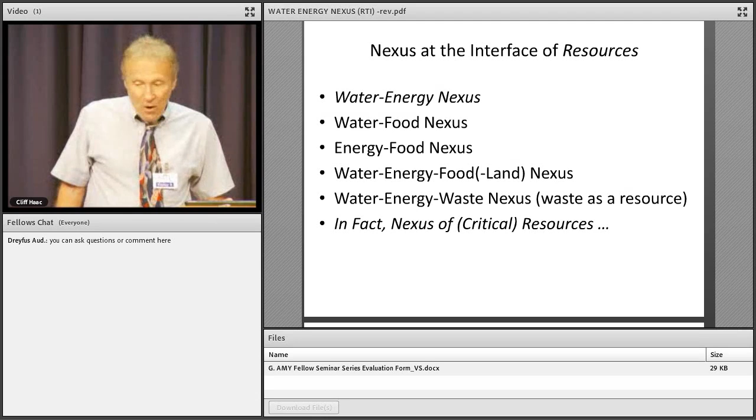So the water energy nexus, I'd like to talk about it, but I'd also like to extend the discussion into other critical resources. So let's first of all establish a vocabulary. What is a nexus? It's a relation or series of relations that will link 2 or more things. So we can think about the nexus at the interface of resources. We'll spend most of our time today on the water energy nexus, but we'll delve into the water food, the energy food, the water energy food nexus, and since food is connected to land, we'll talk a little bit about the land extension. And then given that waste is a resource, we'll talk about the water energy waste nexus as well. So it's really about a nexus of what we consider critical resources.

Oops. Uh-oh. That's part of my...

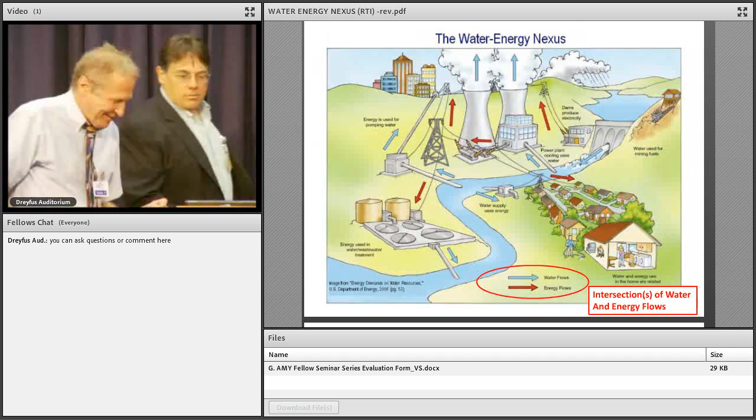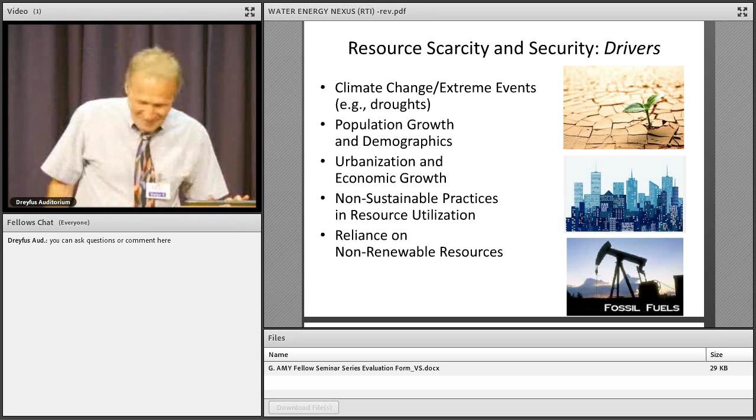Okay, right. Okay. I missed something there, so... Okay, right. The animation was supposed to take care of that, so... Okay. That one? Yeah, but it's supposed to be another version of this, so... Okay, I guess the animation's not going to come out on this, so... Okay, bear with me. Okay. So now we're going backwards. Okay. So now if we do that. All right. There we go.

All right. Sorry for these technical difficulties, but let's go in and talk in more detail about the water-energy nexus. When we think about the water-energy nexus, we're talking about the interconnectivity of water and energy. So obviously there's embedded energy in water, there's embedded water in energy, and we can think about the energy footprint of water processes and systems, the kilowatt hours per cubic meter of water.

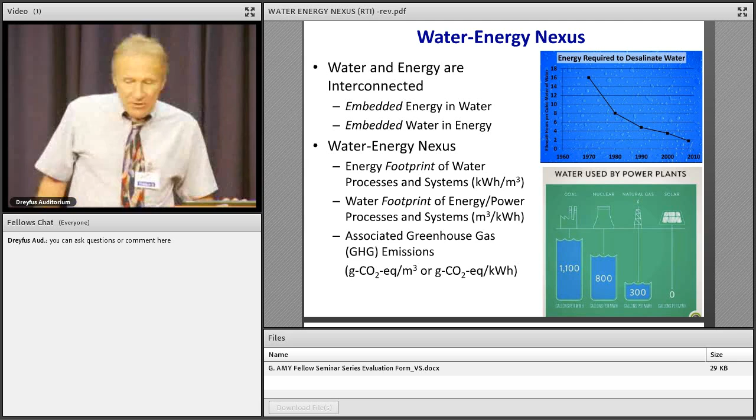We can also talk about the water footprint of energy processes and power processes and systems. Here we're talking about the investment of a cubic meter of water to produce a kilowatt hour of power. And of course, associated with this are greenhouse gas emissions in terms of CO2 equivalents per cubic meter or per kilowatt hour.

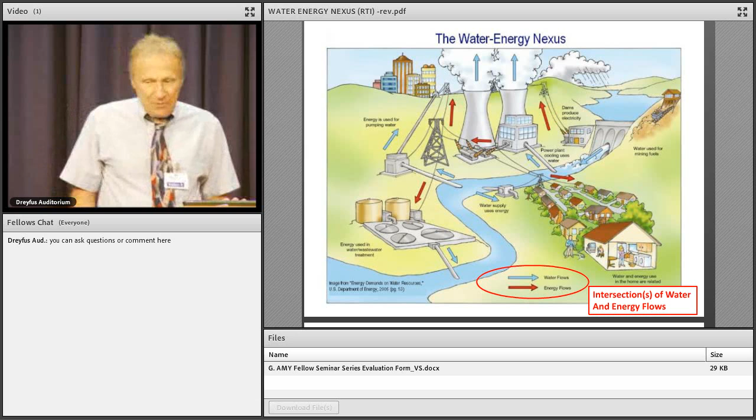So the water-energy nexus, this diagram from DOE shows the water flows and energy flows associated with an urban system. But what's interesting is to look at those points where there are potential intersections of water and energy flows. And this really represents the examples of the water-energy nexus.

Let's talk about water and energy trade-offs. So we can talk about water demand for power. This could be hydroelectric power. It could be cooling water for power plants. We can talk about water demand for fuels. This could be feedstocks for biofuels. This could be the water invested for extracting oil and gas, either conventional or unconventional oil and gas. Mining of energy sources like coal, and refining and upgrading fuels.

And then the energy demand for water. Here we've got to talk about the energy required for extracting water, for treating water, and for transporting and moving water.

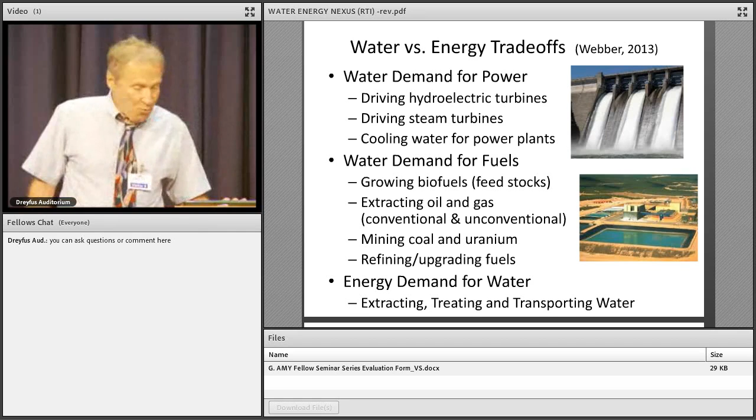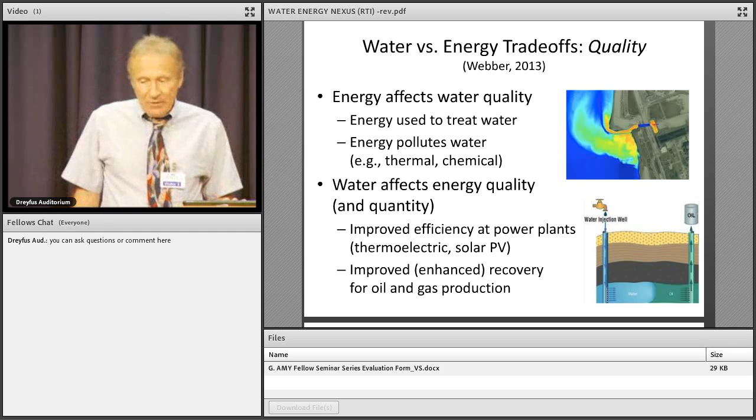Let's talk about energy and water trade-offs related to quality. Obviously, energy affects water quality. We invest energy to treat water, to produce drinking water, for example, but also energy can pollute water when we think about thermal pollution from power plants. And water also affects energy quality. One example of this would be enhanced recovery of oil and gas through water flooding.

So, water and energy solutions. What can we do to really reconcile some of these challenges posed by the water-energy connections? We can think about source switching for water or fuel. We can think about using impaired quality water, such as wastewater or seawater or saline waters for cooling water or for oil and gas extraction. We can think about fuels that require less water.

We can think about more efficient and enhanced technologies that are either energy lean or water lean. Here we can think about water lean energy technologies, dry cooling, for example, waterless fracking, for example. We can think about energy lean water technologies, low energy membrane processes. We can think about using waste heat for water treatment.

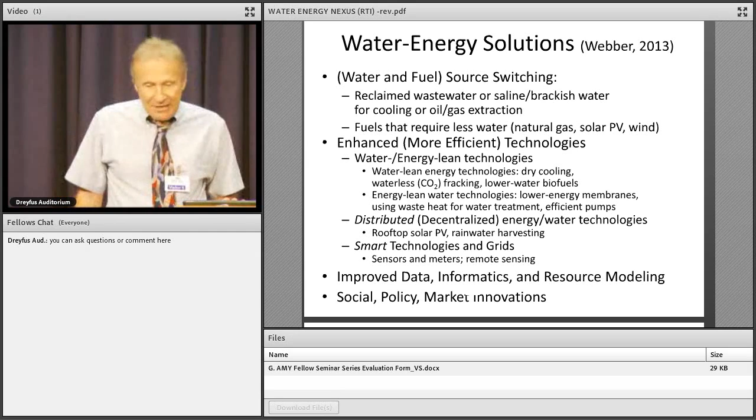And we can also think about how we might look at distributed or decentralized water and energy technologies as well, and the use of smart technologies and grids. We can think about how we can apply improved data mining, informatics, and resource modeling, and also how we can move technologies forward through innovations in social science, policy, and market opportunities.

So energy solutions by water sector. When we think about wastewater treatment, we can recover energy from wastewater treatment. Biogas can be recovered, methane. We can also think about applying renewable energy to drive water purification, such as desalination. This could be solar, this could be wind, but the problem with solar and wind is they have an intermittent character. But we can think about other innovations in terms of combining different energy sources. A combined cycle with solar and geothermal, where we use solar during the day and geothermal during the night.

Water solutions by energy sector. So when we think about cooling, we can think about dry or hybrid cooling. Think about non-traditional or impaired quality sources of water for cooling, seawater or reclaimed wastewater. These present some operational challenges, however, in terms of managing scaling and biofouling.

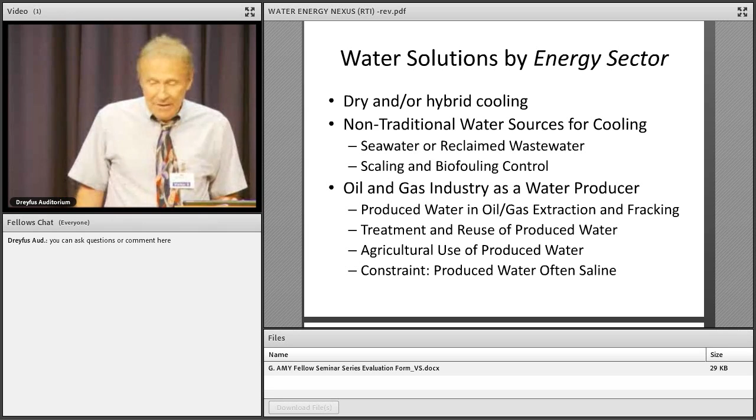And in the oil and gas industry, we have to think about the fact that the oil and gas industry is also a water producer. Saudi Aramco, the largest oil company in the world, considers itself an oil company and a water company in terms of how they manage their water. So there's tremendous amounts of produced water in oil and gas extraction and fracking. We have to think about how we can treat and reuse this produced water, and even possibly imagine agricultural use of produced water. The constraint in terms of using produced water is that it's often saline.

Okay, let's look at USA water withdrawals by category. And so if we look at these different categories, it's obvious that thermoelectric power and irrigation are the major uses of water in the US. But we also have to distinguish between withdrawals of water and consumptive uses of water as well. And so in thermoelectric power, we have a large consumptive use due to evaporative losses.

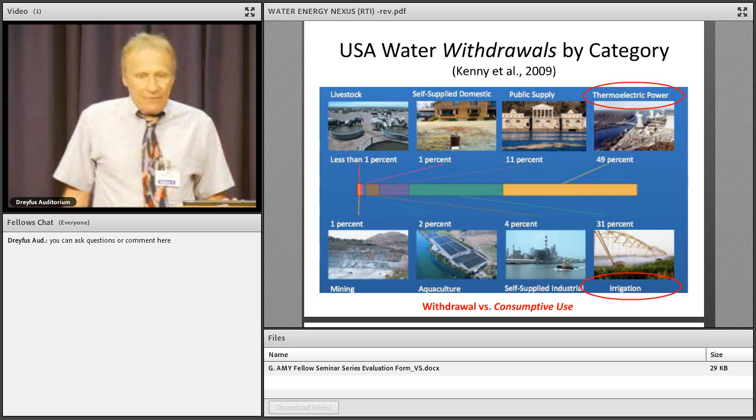So energy intensity of municipal water use. So if we look at the water cycle, in blue we see our drinking water part of the water cycle. In red we see the wastewater part of the water cycle. And then in green we see our interventions in capturing reclaimed water for reuse and recycling.

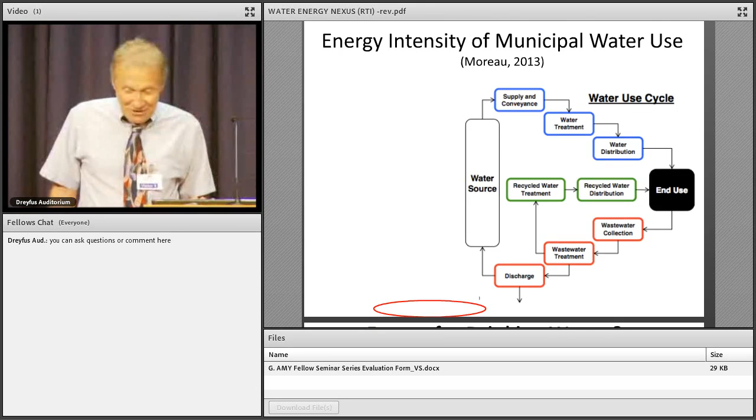I'm worried that this is part of the animation problem here. Yeah. So part of my animation has disappeared as this was converted to PDF. So, yeah. So I'm sorry, but okay.

So let's take a look at the urban water cycle and the energy nexus. So if we look at how we move water, for example, in the drinking water side of things in the upper right, we transport water to the waterworks. We think about treating that water and then distributing the water. And we have to invest so many kilowatt hours per cubic meter to do this.

And then once we go through the cycle of domestic water use, then we have to treat the sewage, collect the sewage, and dispose of the sewage. And so energy considerations are a dominant factor in the urban water cycle.

Let's take a look at seawater reverse osmosis and think about the energy consumption issues related to seawater reverse osmosis for desalination. So a seawater reverse osmosis system consists of an intake, pre-treatment, the reverse osmosis membrane step itself, and post-treatment. And so what we see here are a series of arrows that represent energy consumption. And the thickness of these arrows is really commensurate with the amount of energy that's consumed at the various stages.

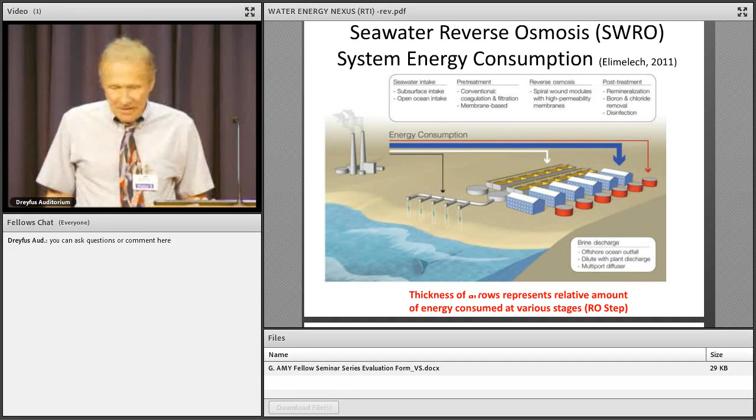And so the real energy hog, so to speak, here is the reverse osmosis step itself. And so we need to think about how we can develop new disruptive technologies that will provide lower energy consumption in removing salts from water.

Let's take a look at California. California is kind of interesting because California expends a lot of energy in moving water. What we have is dry and thirsty Los Angeles in the lower part of the state. And Los Angeles, Southern California, gets its water from Northern California through the California Aqueduct and from Arizona, Nevada through the Colorado River Aqueduct.

And what we see in the upper right-hand corner is a graph showing the energy expenditures just to move water from Northern California and the Colorado River to Southern California. Not treating it, just moving it over topographical barriers and so forth. And so obviously there's a lot of interest now in California in turning to the ocean. We can see that Los Angeles is right in the proximity of the Pacific Ocean, and reinvesting that energy into desalination.

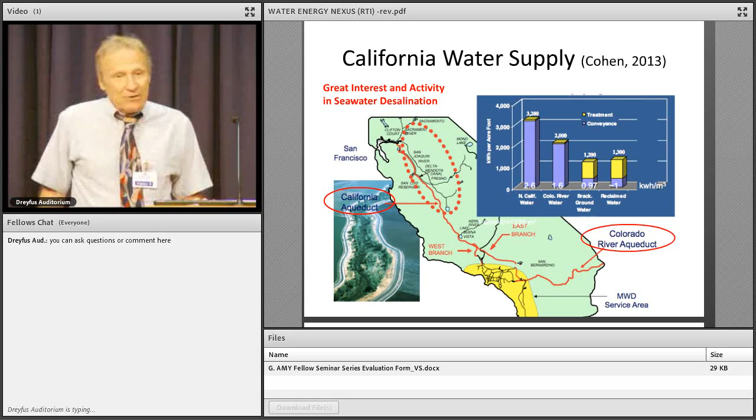So let's take a look at energy uses for different wastewater treatment processes. So here we see energy use, kilowatt hours per cubic meter. Some of these are fairly low energy intensity, trickling filters, for example. And then as we go to more and more advanced municipal wastewater treatment, we spend more and more energy.

Now, one of the things that's really an energy sink is in wastewater treatment, we use biological treatment that requires oxygen, and so we have to aerate. And aeration is very energy intensive. The activated sludge system requires a lot of aeration. Membrane bioreactors require aeration not only for oxygen, but also for membrane fouling control as well. So these are very significant inputs of energy.

However, all those organic constituents of municipal wastewater have embedded energy. So can we imagine harvesting that energy? And can we imagine to actually see in the future the possibility of energy neutral or even energy positive wastewater treatment?

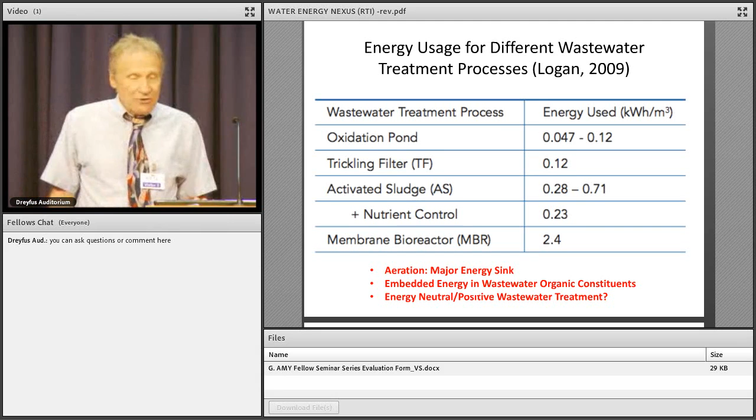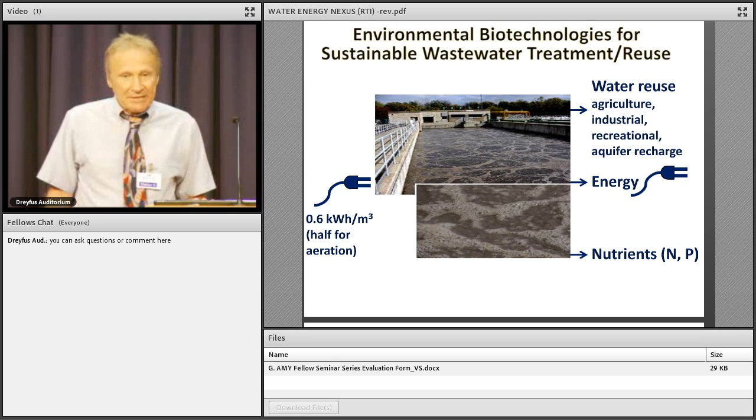So, environmental biotechnologies for sustainable wastewater treatment. So here we have an activated sludge system. We're investing so many kilowatt hours per cubic meter, half of that for aeration. And so what can we get out of this system? Well, we want to get water out of it, obviously, for potential reuse. Can we harvest energy as well? And also there are valuable nutrients such as phosphorus that are contained in the wastewater itself. And can we extract valuable materials such as phosphorus?

And so what advantages do we derive here? An anaerobic membrane bioreactor has a smaller footprint. Because of the membrane, it provides better permeate quality. And it also produces less sludge because of the anaerobic digestion, and it produces biogas. So here we have an opportunity to recover energy through the biogas.

And so we can recover up to about a kilowatt hour per cubic meter of energy if we operate this system at 35 degrees centigrade, which is an optimal temperature. Now, if you're in Singapore or Saudi Arabia, where you have high ambient temperatures, you can begin to approach this. If you're in a colder climate, you have to reinvest part of that energy to heat up the water, so to speak.

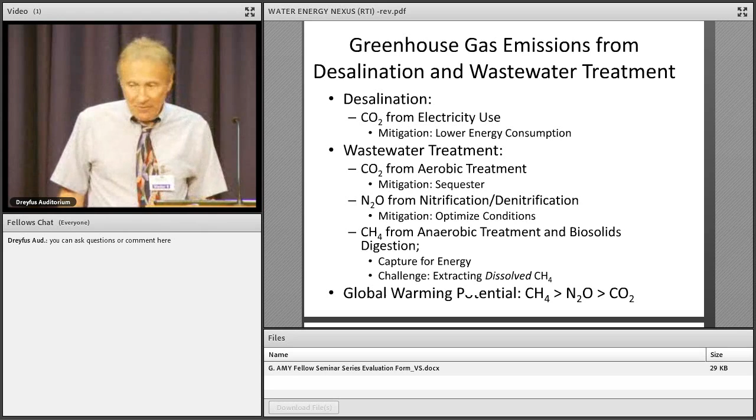So let's look at thermoelectric power generation cooling options. We can think about once-through cooling. And this is how many of the cooling plants along the coast of California operate. However, there are discussions and regulations underway to limit the use of once-through cooling.

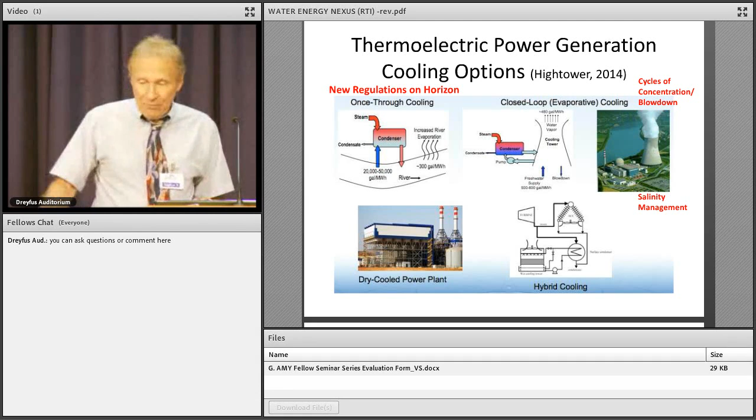And so we may see that we have to move more and more toward closed-loop evaporative cooling, where we actually have a cycle of concentration and a blowdown that we create that is high in salinity. And so this requires that we manage the salinity of the blowdown stream. We can move to dry-cooled power plants or even hybrids of dry and wet cooling.

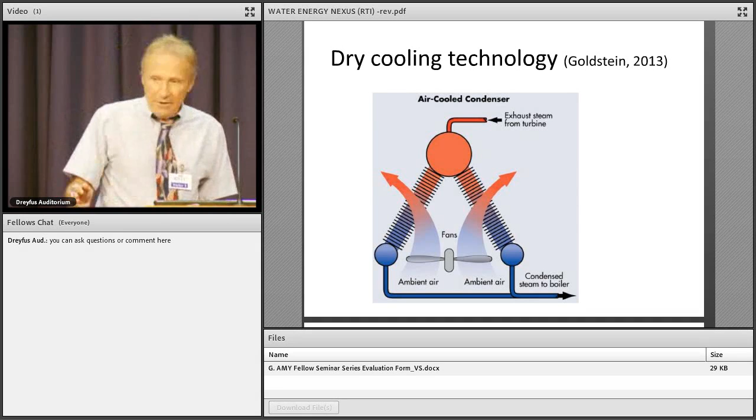So here we see a little simple schematic of a dry cooling technology where we look at using air as opposed to water for cooling. There's still an energy investment here, right? So we still have to invest some energy to provide this cooling, but you're moving away from the water investment if water scarcity is the driving issue.

So let's look at opportunities for power plant water use reduction. So what are some of the things we can do? Well, coming out of that cooling tower is a lot of water vapor, right? Saturated water vapor. So how can we think about condensing that water vapor? Using less water for cooling, more efficient cooling.

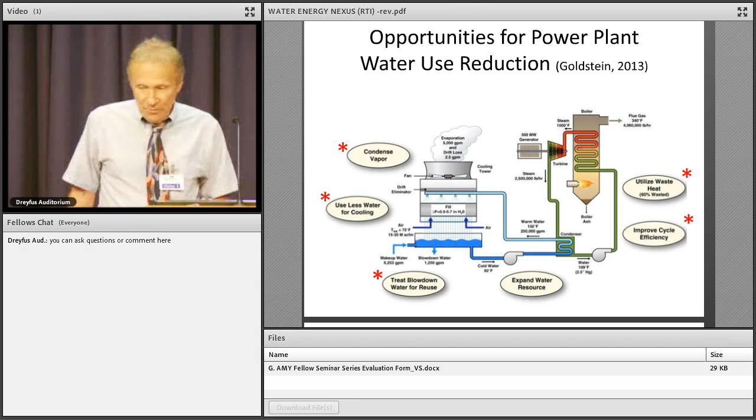Treating the blowdown water for reuse. Looking at utilizing waste heat and improving the cycle efficiency. So we can really attack this problem on several different levels in terms of water use reduction. Let's move from cooling to fracking.

So we think about water use in shale gas generation through fracking. We start out with the fresh water source, and we add some fracking chemicals, and we end up with our fracking fluid. And so we develop our fracking well, and then we end up with our flowback water initially, and then more long-term we end up with our produced water.

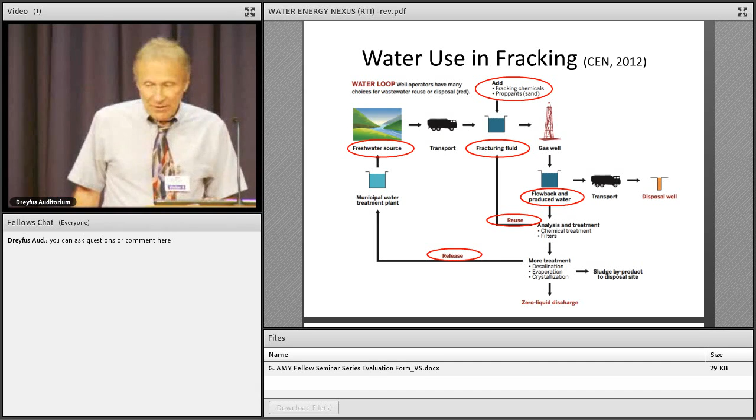And so what do we do with this poor quality water that we've created? We have to think about opportunities for reusing or treating and releasing back into the environment. So we have to think about innovative technologies for produced water treatment and reuse.

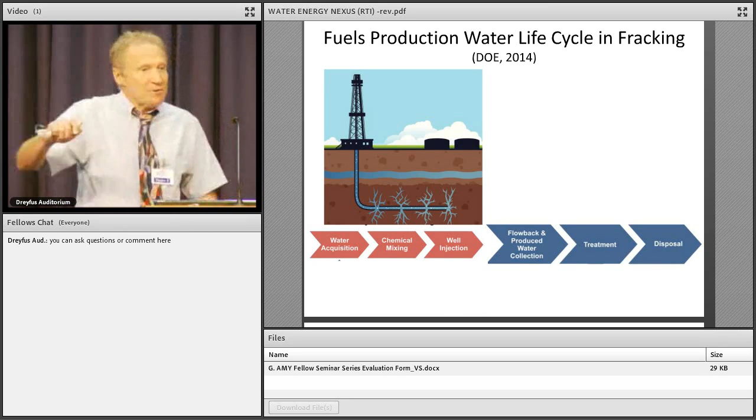So fuels production, water cycle, water life cycle, and fracking. So we have water acquisition, chemical mixing, well injection, flowback and produced water treatment disposal. We want to interrupt this linear scheme to make it more of a circular scheme in terms of reuse and treatment of produced water.

Okay, so produced water in some of these slides did not translate very well when I lost the animation. Sorry about this, but I had my animated version perfect this morning. Tested it out at 5:30 a.m., so I didn't know I was going to be stuck with a non-animated version, but in any event.

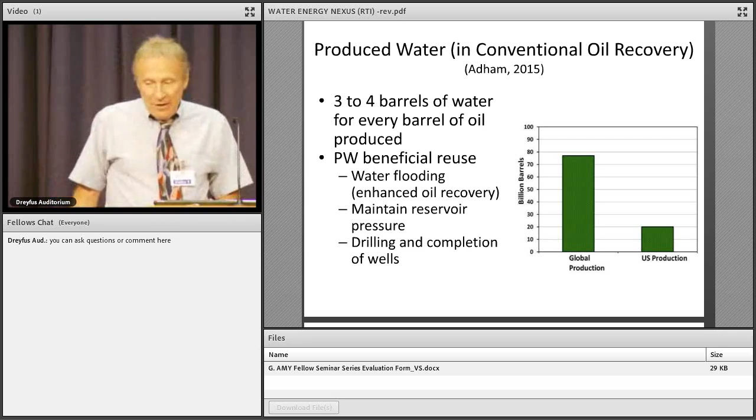So produced water in conventional oil recovery. So we go to Saudi Arabia, and for every barrel of oil that you produce up to 3 to 4 barrels of produced water. And so what can you do with this produced water? You can re-inject it into the oil reservoir. And this is known as the practice of water flooding that can be used to maintain pressure and enhance oil recovery from that oil reservoir. And we can also use it in the drilling and completion of wells.

So let's look at produced water from an unconventional fossil fuel. So let's move from conventional to unconventional or fracking. So what does it take in terms of developing a hydraulic fracturing well? So we have about 50,000 to 150,000 barrels of water just to create the well.

And then after a well starts operating, we get about 15 to 80% of the volume that's recovered as the initial flowback water that contains all of those drilling chemicals and drilling fluids. And then more on a long-term basis, we get 10 to 1,000 barrels per day of produced water from each production well.

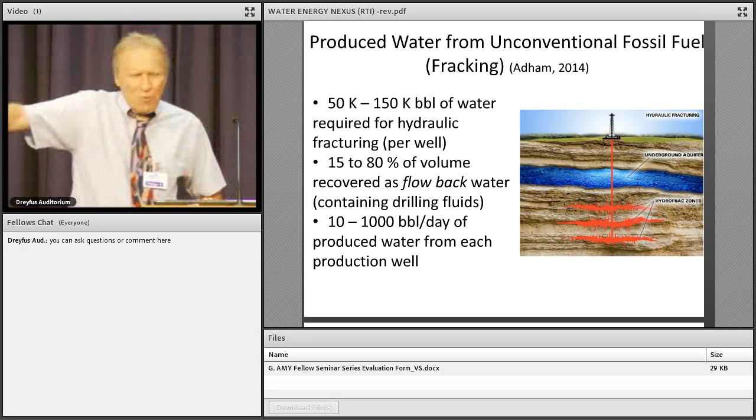So obviously we have to be able to manage these tremendous volumes of water that are often in very remote locations. They're not next to a sewage treatment plant. They're often out in remote locations where you have to think about either on-site reuse or even the possibility of truck transport to an off-site facility.

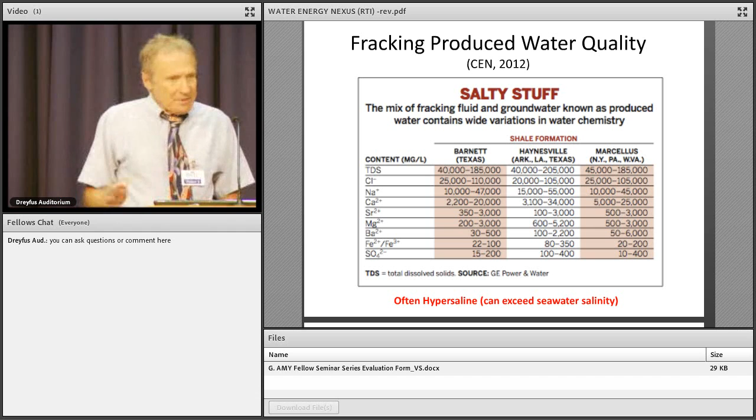So fracking produced water quality. So we look at some example produced water quality from fracking operations in Texas and West Virginia. The first thing we can see is this is pretty salty stuff. It's often hypersaline and in many cases more salty than seawater. So this is a big constraint. We have to think about desalination if we want to reuse this water.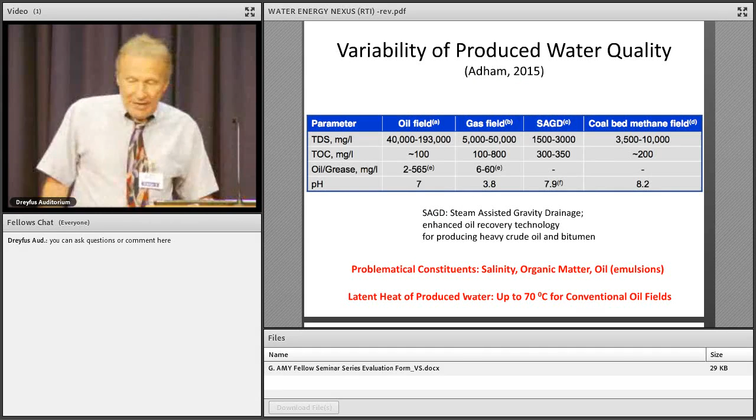There's also variability of produced water quality. So here we see different produced waters from an oil field, gas field, coal bed methane field. And what we see are variations in salinity, very high TDS levels to lower levels in coal bed methane fields, big variation. We see a lot of organic matter as evidenced by the total organic carbon. And we see a lot of oil in the produced water, often in the form of emulsions, oil and water

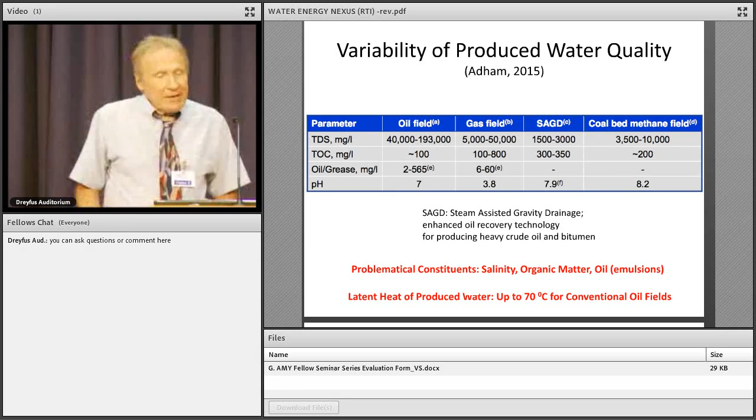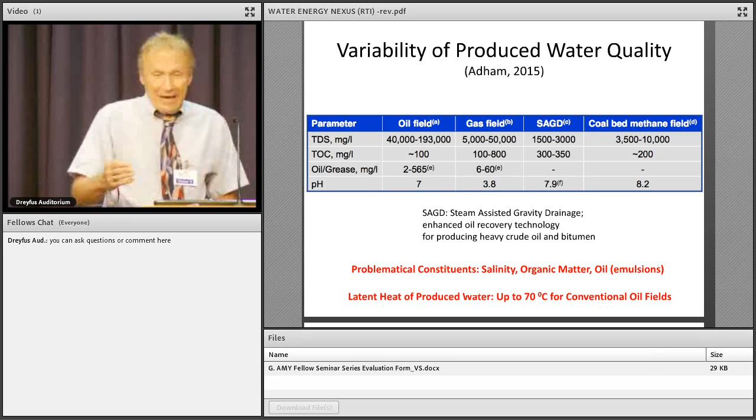emulsions. Another thing to take note of is that in conventional oil fields, like Saudi Arabia, for example, when you bring up oil and produced water from a conventional oil field, that water has latent heat. It can be up to 70 degrees centigrade. And that is really a form of quote-unquote waste heat that could be used to potentially drive a desalination process.

So produced water treatment and reuse. What are some of the options? On-site treatment versus transport to a central facility, which is what you want to avoid, of course. And you can think about all the greenhouse gas emissions as this caravan of trucks moves water to a central facility. There are conventional technologies that we can use, such as evaporation, but on the horizon are novel technologies.

Membrane distillation only requires a slightly elevated temperature to move water vapor through a membrane. And remember that latent heat of produced water? That alone could drive membrane distillation for desalting purposes. Forward osmosis can be used to concentrate brines, concentrate waste streams. If you're going to transport water by trucks, if you can reduce the volume 3 to 4-fold, that has a

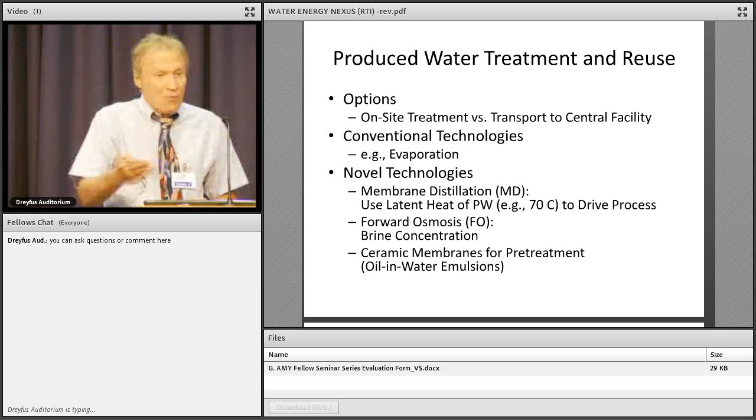tremendous advantage. And then also, what about all those oil and water emulsions? How do we really manage those? Those have a tremendous fouling potential for reverse osmosis if we wanted to use that. There's a lot of interest in using ceramic membranes for removing oil and water emulsions.

Let's look at the freshwater intensity of energy production. So we're looking here at barrels of water per barrel of oil equivalent. And down on the lower part of the graph, we see shale gas. We don't really have to invest that much water in shale gas compared to other energy production options. We look at electricity in a coal-fired plant. But at the top, what do we see? Ethanol, biofuels, and the tremendous water investment required for producing biofuels and biofuel feedstocks.

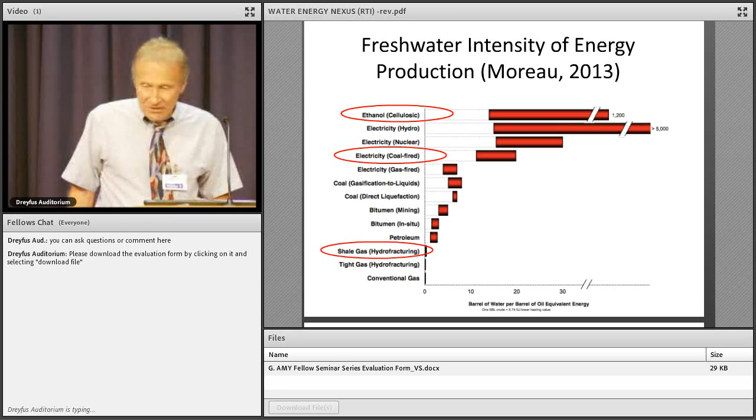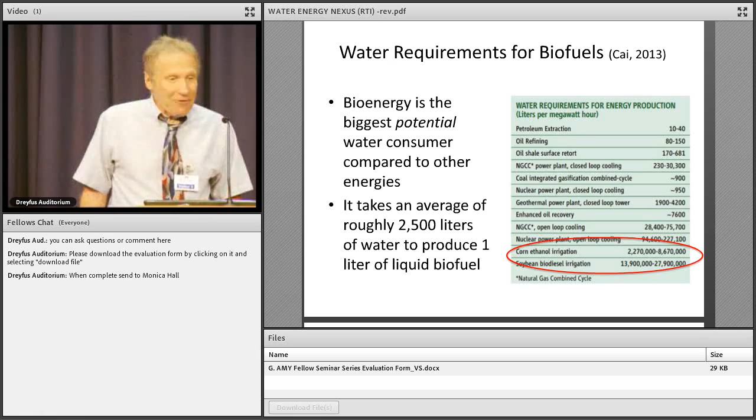Let's talk a little bit about biofuels, water requirements for biofuels. So obviously, when we think about energy opportunities and alternatives, bioenergy really represents potentially the biggest water consumer compared to other energies. And just sort of a rough rule of thumb, it takes an average of 2,500 liters of water to produce a liter of liquid biofuels. So that's quite an investment of water for energy.

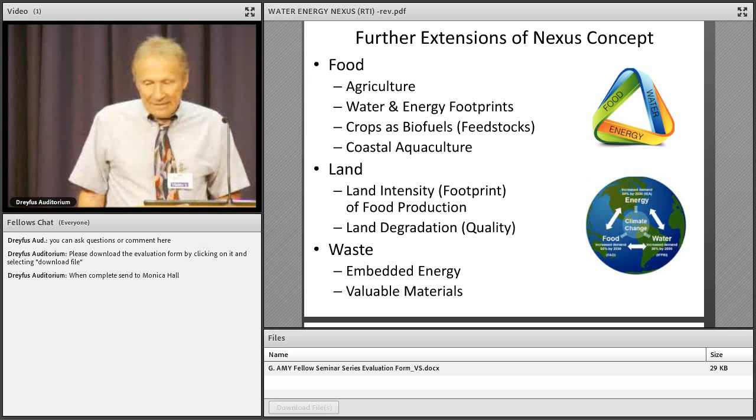Now let's move this discussion beyond the water-energy nexus, and let's connect it to other resources. And so other resources we can talk about briefly will be food, agriculture, and we can talk about both the water and the energy footprints of food production, talk a little bit about crops as biofuels. We'll talk about land intensity of food production, land degradation, and then we'll end up with waste and look at embedded energy and waste and recovery of valuable materials.

So the water-food nexus. So water-food nexus, we're talking about water required for agriculture, food production. Agriculture represents globally the highest water use sector in terms of water withdrawals and use. This, of course, involves management of land resources and the water footprint of food production. So this all leads to the very interesting concept of virtual water.

So if you had a sandwich today and there was beef in it, I don't know if there was, how much water did it take to create that beef? How much water does it take to create a hamburger and to grow a cow? So we really have to think about cubic meters of water to really produce a kilogram of beef. And we have to think about the differences between different food sources.

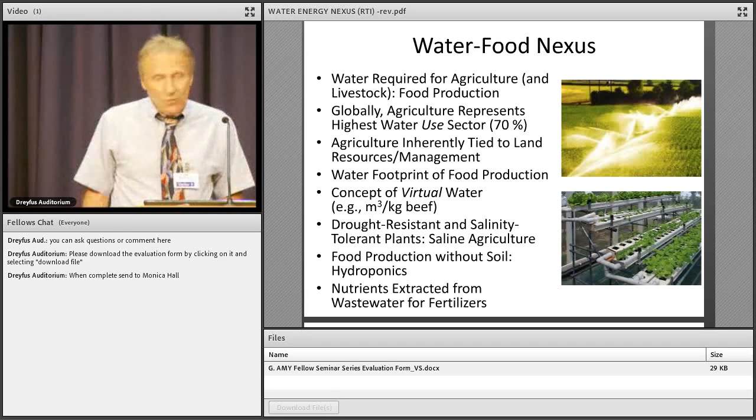There are many opportunities, given the freshwater scarcity, to think about how we could go into the concepts of saline agriculture and think about how we can genetically modify crops to be more salt tolerant or even drought tolerant. And we can think about, given land considerations, how can we grow food without soil through concepts of hydroponics, for example. And then finally, how can we extract nutrients for fertilizers?

So, the water-food nexus. We have to think about a virtual water footprint. So, all crops and foods have a virtual water footprint. A raw crop has a footprint, and a processed crop has a footprint as well. So, if you're talking about wheat, or if you're talking about bread, there's a certain water footprint. Now, we think about global commerce and the movement and export and import of food. What we're actually doing is moving and importing and exporting water in the form of virtual water.

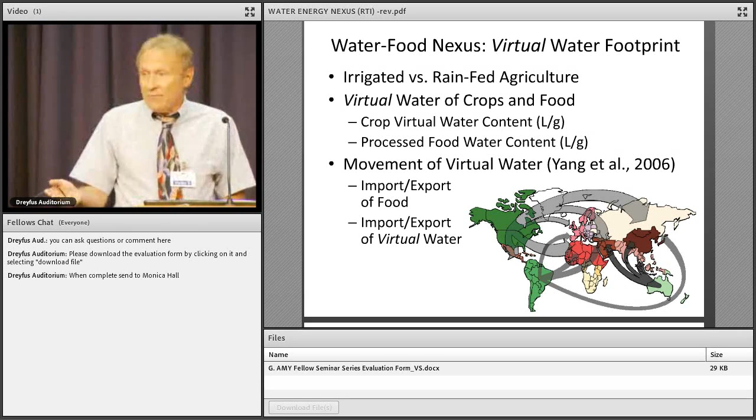So this little diagram just tries to show you the differences in terms of the virtual water footprint of different foods and different processed products from food products as well. And of course you can see beef is a very big water consumer compared to wheat and barley, for example.

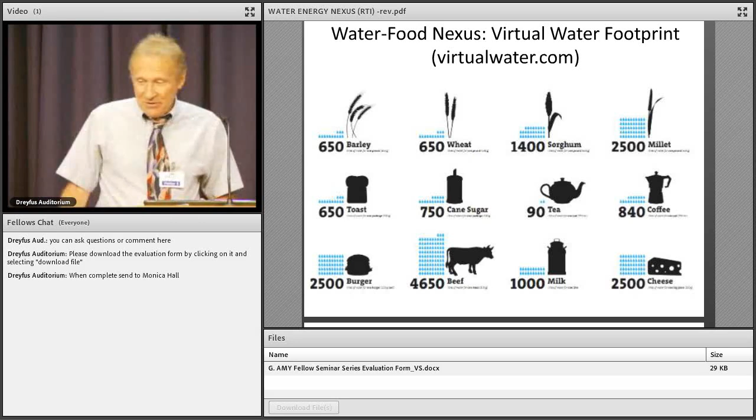So mitigating measures, what can we do? We can think about improved irrigation efficiency. And we can also think about moving away from fresh water and irrigating with non-traditional waters. Of course, we have a long history of using reclaimed wastewater for crop irrigation. The big issue there is public health risk in terms of pathogens.

But the real opportunity is with saline water, and to use saline water for salt-tolerant crops or to genetically modify crops to make them more salt-tolerant. And so here we open up the doors to the opportunity for saline agriculture.

Now, when we think about managing water for irrigation, we have to think about how we optimize things. And so there's a whole field of precision agriculture that is really the basis for how we operate so-called smart farms, real-time monitoring of water conditions, soil conditions, and nutrient conditions for operating a smart farm.

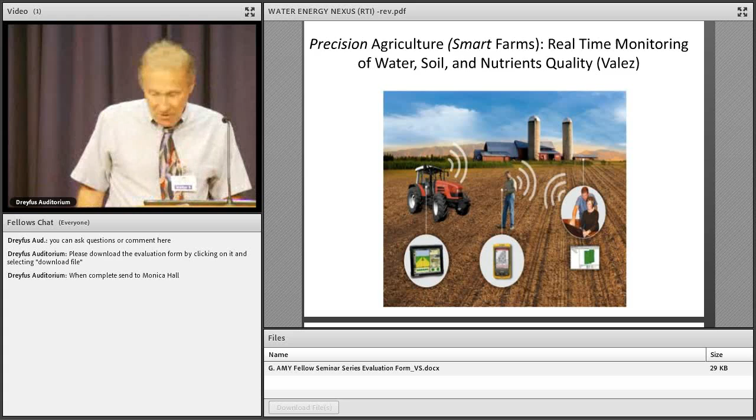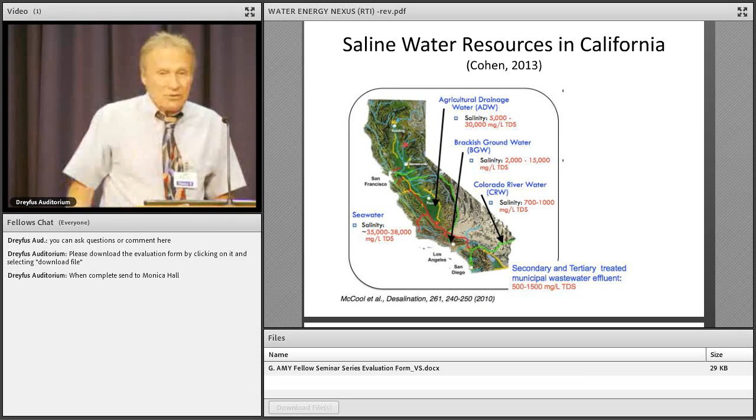Now let's look at saline water resources in California. We know there's a drought in California, and they're thinking about desalination. But besides the ocean, there are inland sources of saline waters as well. Agricultural drainage water, brackish groundwater. Even the Colorado River water has moderate levels of salinity, and wastewater has moderate levels of salinity as well. So here in California, there are opportunities to implement saline agriculture if we can make crops more salt tolerant and manage soil salinity.

Now, some interesting developments in Australia. So drip irrigation has been around for a long time as a way to improve the amount of water that is applied to a crop. But what if we have saline water? Could we take a drip irrigation tube and replace it by a membrane-like tube, a reverse osmosis-like tube that would not only distribute the water, but desalt the water as well? So this is the concept of membrane-facilitated subsurface drip irrigation. And this would open some further doors to saline water agriculture.

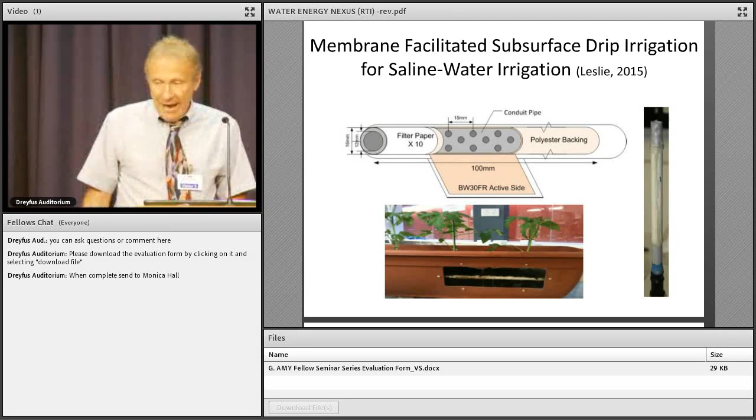Now we think about growing crops on salty water. Here we see a graph showing relative yield for salinity level with different groups of crops, including halophytes, salt-tolerant crops. Now, even in salt-sensitive crops, we see there's still ability to grow crops in saline water, but there's trade-offs. Trade-offs between the yield and the salinity. So we have to recognize that trade-off, and we also have to think about how we might increase the salinity tolerance of salt-sensitive crops. And there's a lot of work ongoing in areas such as tomato breeding and genetic modification.

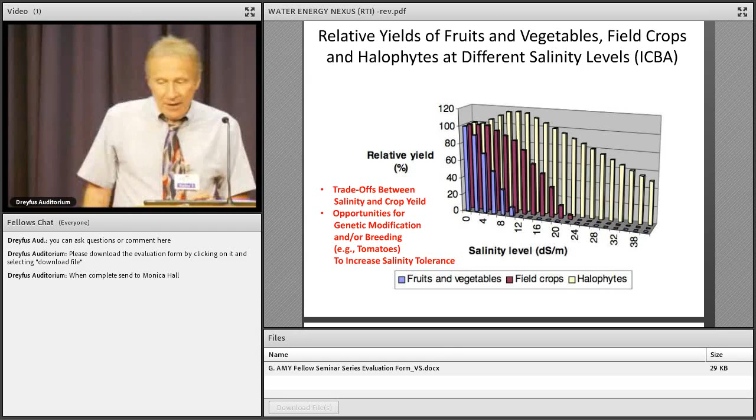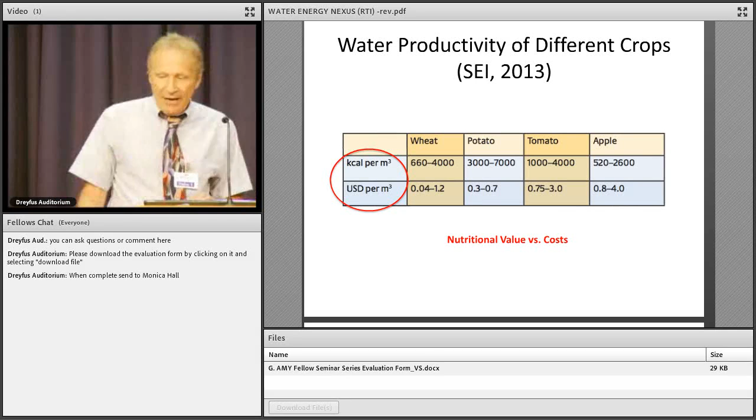Now, I'll skip over this.

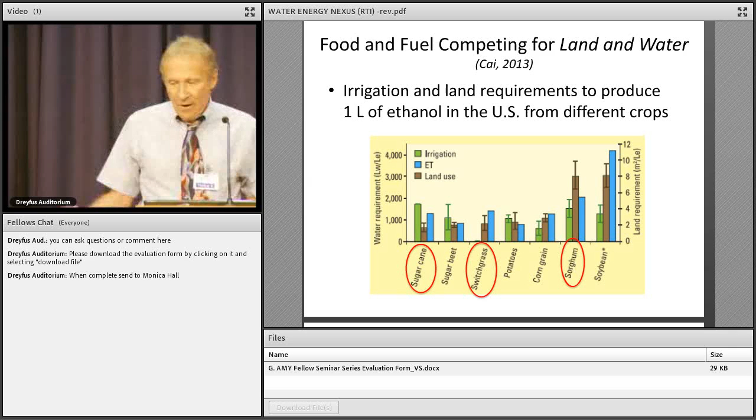Okay. Now, food and fuel are competing for not only water, but land as well. So this graph really shows the irrigation and land requirements to produce 1 liter of ethanol. And so if you look at sugar cane, what we see is that sugar cane, relatively speaking, is more water intensive than land intensive. Switchgrass is vice versa, more land intensive than water intensive, and sorghum is on the extreme in terms of being both water intensive and land intensive. So we have to think about not only the investment of the water resource, but the land resource as well.

Okay, so what can we do in biofuels? So we have to think about as we go forward, we're moving from first generation biofuel feedstocks, i.e. crops intended for human consumption, like corn. And because of the conflict between food and biofuels, we're trying to move now to non-food biofuels and feedstocks. Now, the basic hope or the basic premise is that second generation feedstocks should grow on marginal land, they should require less water, and they should also be able to use poor quality water.

Unfortunately, reality versus these goals has not borne itself out. So it's still an escaping goal to really achieve these ideal characteristics of second generation food crops or biofuel feedstocks.

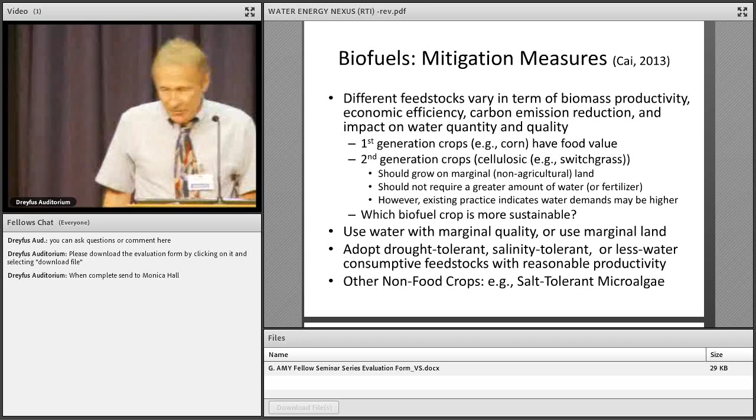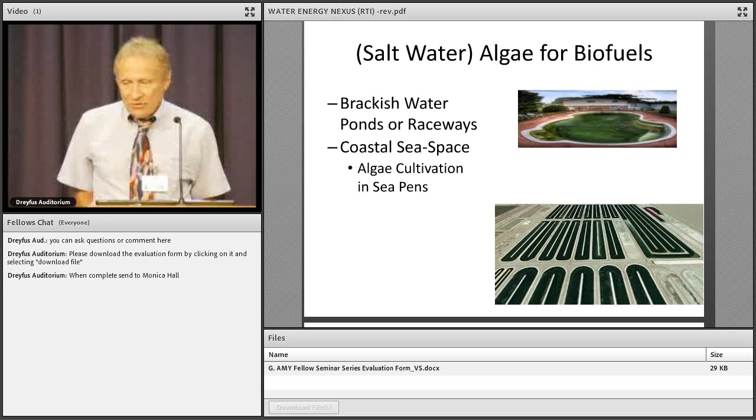Another opportunity, going beyond just switchgrass or sorghum as far as potential feedstocks that are not food sources, we can think about algae and even the opportunity to grow saltwater algae for biofuels. This could be done inland in brackish water ponds or raceways or coastally in terms of algal cultivation pens.

Energy food nexus. Okay, I'm going to skip over that.

Okay, now, the energy food nexus, we're confronted with a key problem here. If we think about growing corn, 8 bushels of corn creates 21 gallons of ethanol, but that's enough to feed a person for a whole year. And so you have this sort of conflict between water scarcity, energy scarcity, and food scarcity, and how you resolve that. And so this is one of the reasons for moving towards second generation biofuel feedstocks.

Okay, water energy waste nexus. Let's bring waste into the picture here. So the water waste nexus, we recognize that waste streams such as brines do contain energy. Energy is embedded in waste streams. And besides the energy that's embedded in these waste streams, there are also potentially valuable materials.

There is lithium in seawater brines. Lithium is very important now, of course. And there's phosphorus in wastewaters as well. So this opens the door to the water, energy, waste nexus.

So let's think about a wastewater treatment plant as more than just an ordinary sewage treatment plant. Let's think about it more boldly as a resource recovery plant. And this is sort of a paradigm shift as we think about reimagining wastewater from a waste to really a resource. And this is really the business case for promoting this.

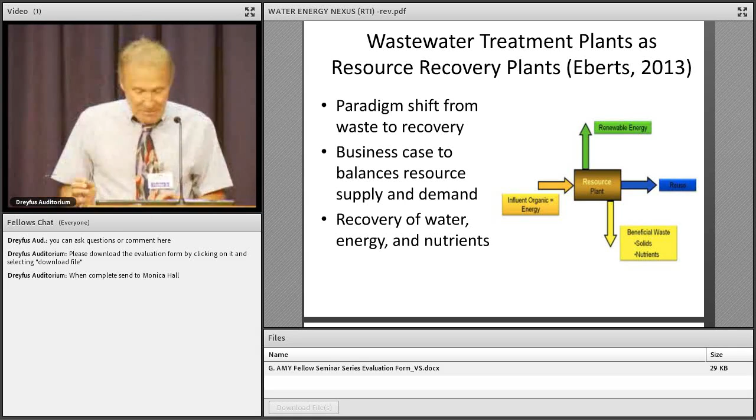So if we have a wastewater, what do we get out of it potentially? Water for reuse. We also can get energy, potentially in the form of biogas, we used that example, and also valuable materials, for example, phosphorus from wastewater.

Okay. Now, finally, let's extend this discussion now to include land. So the water, energy, waste, land nexus. Now, the reason I'm doing this is I spend part of my time in Singapore. Singapore is an island nation with a very high population density. And land is critically important to Singapore, how they manage their land in a very high population density country.

So they're looking for integrated solutions that really address the issue of water, energy, and land. Let's think about some of the things that they are doing there. So let's think about land use and land intensity. So one thing we can do is facility integration, co-location of facilities.

We can co-locate wastewater treatment plants with anaerobic digestion facilities. And so what we can do is we can take the biosolids from the wastewater plant, and we can take food waste that has been captured from Singapore and anaerobically digest them for methane.

We can co-locate desalination and wastewater reuse facilities. And this opens the door for the capture of energy from salinity through salinity gradient energy processes such as pressure retarded osmosis. And we can also co-locate industry facilities with desalination facilities, particularly if those industries have a lot of waste heat available for recovery and utilization for driving desalination.

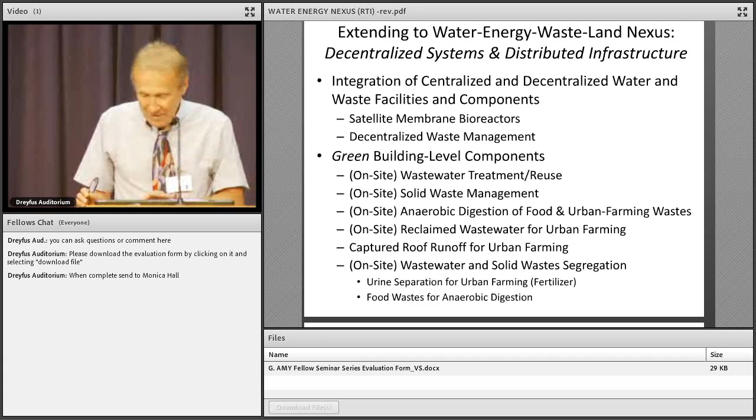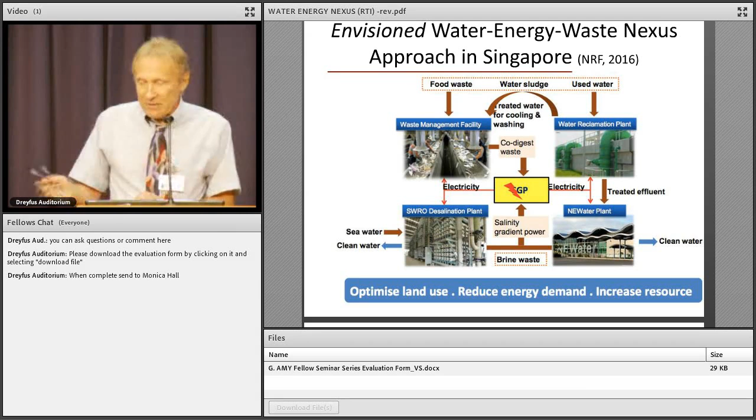Through the NEWater plant and the brine, you can create salinity gradient energy. Through the digestion of wastewater solids and food waste, you can anaerobically create biogas and create energy as well. So this is the approach to really optimize land use, reduce energy demand, and increase resource efficiency in Singapore.